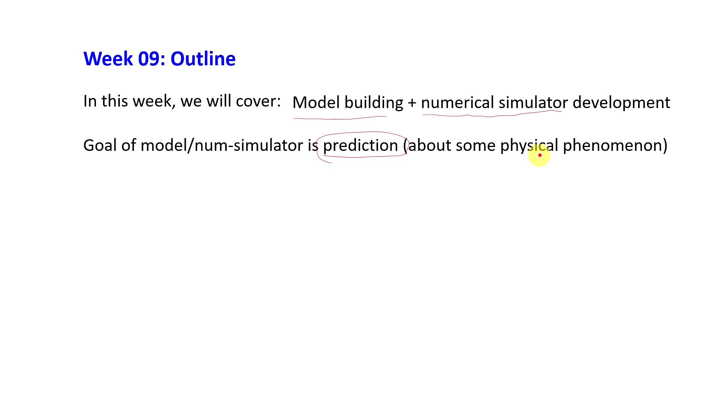About some physical phenomena we want to predict, such as what will be the weather tomorrow, or how much will be the economic growth of our country next year. We want to predict them. And how do I predict them? I need a model for prediction.

Now, the model that we use in engineering, usually there are three types of model. The first type is that gives us a big picture, and generally they are ODE based. It's not necessarily always they will be ODE based, but generally they are ODE based. Similarly, these ODE based models which will give us big picture, if we want to improve it further, if we want to go deep into it, if we want to know detail, then sometimes we have to look at some of the components in great detail. Usually, some of the PDE based model come there.

And then there are many cases where we actually don't know the governing equations of a particular phenomena. We don't know the mathematics of a particular phenomena very cleanly, or as much as we know, they are not suitable for any prediction. In those cases, our models will be based on the available data that we have. And these are the part that we are going to cover in this course later on, that based on data, how can we predict something when we do not have equations? So they are data-driven models.

Now, the model building, it's a process that requires long-term learning and long-term practice. It cannot be taught in a single course in a matter of few weeks. And I don't intend to teach that part here. That is impossible to do so. However, some important idea of model building you have to take from this course, because this course is anyway at the end about numerical simulation. Without a model, the simulation has no meaning. And this model, as well as the simulation, has to predict something about some physical phenomena. Without this entire pipeline, this practice of numerical simulation is of no meaning for engineers.

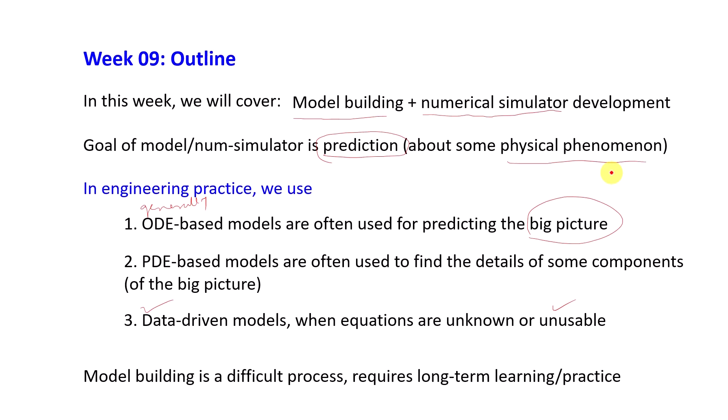So let us take this example, because this example we have discussed initially, then we didn't do about it. So let us take this example once again. The problem here was that we have a payload and we want to down that payload somewhere where it is necessary. Let us say it's a disaster affected area and we are bringing down certain food packets or medical equipments there. And we are using a parachute to down the payload. We are interested to know how much load I can put in the parachute so that when it hits the ground, its velocity will be low enough that it doesn't harm the equipment or food that is inside. And many other parameters we may also be interested to know, where we have to drop so that it falls in a particular place. Many other parameters we may need.

The simplest model, of course, of dropping certain payload comes from using Newton's law. Here we write that m, that is mass of the payload, multiplied by du/dt. U is the velocity, t is the time. So this mass into acceleration is balanced by this mg, that is the weight of the payload. We can solve this equation. This is easy because g is a constant. This is just super simple. Then we start with u at time t equal to 0 is 0. So when I am putting the payload from an aircraft, there is no downward velocity there.

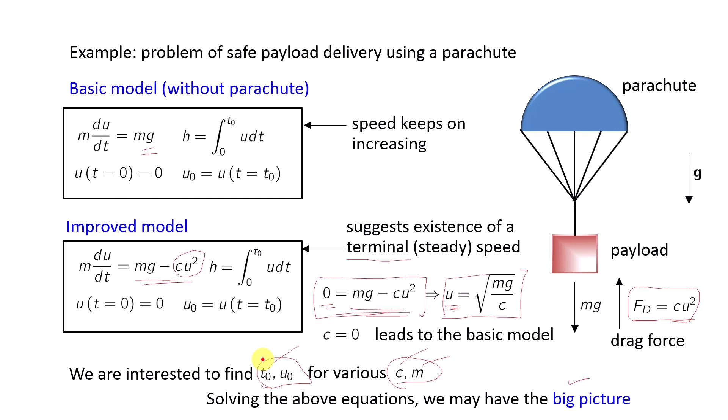If we solve this equation now, we can get the big picture: how much time it requires to hit the ground, and what the speed could be. It will be an approximate picture, not in great detail. So let us say that we want to solve it. We can solve it analytically, but it may not be easy. Going through this integration may be slightly difficult, although it can be done.

The other way is to do it numerically. Instead of doing this integration, we can write dh dt equals minus u. We start from a certain h naught, the initial height, and then based on the speed, h will come down. So dh dt will be the negative of the velocity.

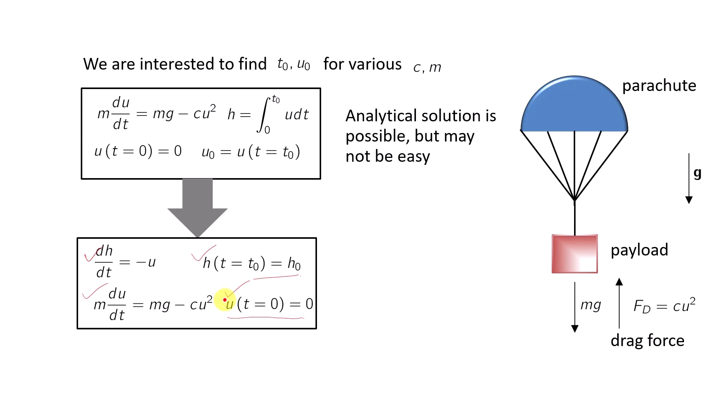And the second equation is the usual equation, m du dt equals mg minus cu squared, where at the initial time u was 0. So we have two ordinary differential equations with two initial conditions, and they are solvable. They look coupled, but they are basically uncoupled. Once we solve u, it can be fed in here to solve h. Numerically, we can solve it very easily. You already have the solver for this, I hope, and now you can use that.

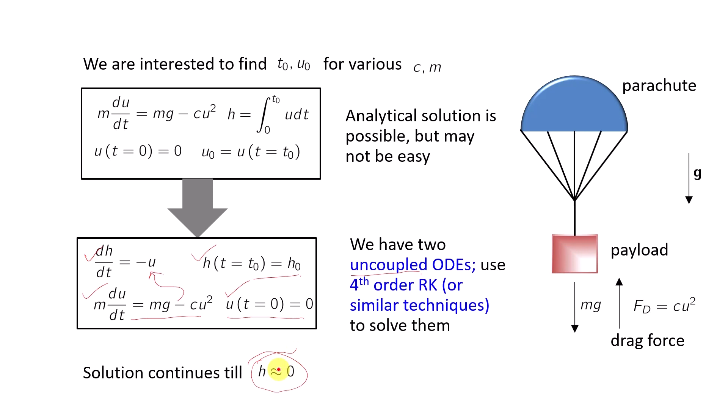Once we solve it, we will get h and u as functions of t. We have to stop the solution, because the solver doesn't know whether h is greater than 0 or less than 0. The solver will keep on running, so we have to stop it when the payload hits the ground, meaning h is very close to 0. At that point, we'll stop the solver and check the results.

So I actually ran this using our old solver that we developed before, you remember, in the predator-prey model. Using that solver, I got this result.

This is the case when we have no parachute, that means c equals 0. You see that the velocity here, this downward speed, keeps on increasing linearly. And it hits very high actually, 140. The payload hits the ground in 14 seconds, very quickly, slightly above 14 seconds. At that point, the speed is 140.

That is understandable because we know that this du/dt is g. So you can see that 140 by 14 point something is about the value of g. So it's understandable that the speed is increasing linearly with du/dt equal to g. So u is equal to gt, and with t being 14 point something and g being 9.8, it would be about 140. 140 meters per second is actually a very high speed,

and it's very difficult for my payload if it contains some sensitive medical equipment or food product. It will probably be destroyed due to the collision at this kind of speed. On the other hand, this is the height, and I started from 1 kilometer height, and then it comes down. Within 14 seconds, it hits the ground. So very quickly it hits the ground, and we can see how the height is changing with time.

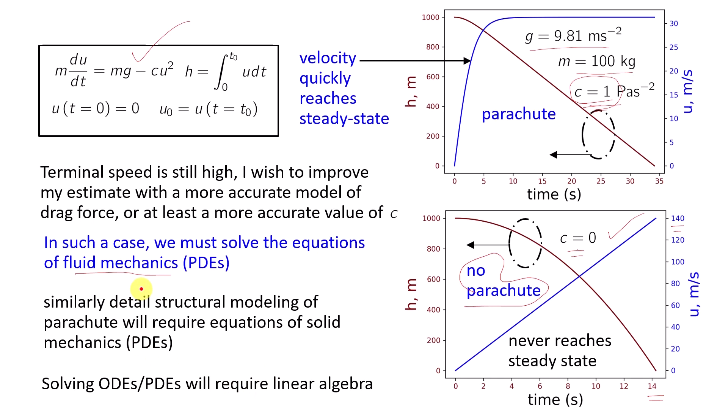So overall, there is no limit to how far I can go model-wise. We can make it even more complicated, but the main point is you can get a big picture, and this big picture is not a bad picture, from a very simplistic model like this. As you improve it and make it more accurate, you have to bring more and more equations and your model will become more and more complex. When you try to solve these ODEs and PDEs, you will require linear algebra. This is where linear algebra, PDEs, ODEs, everything comes together. The entire numerical methods course comes together to help you build the simulator.

But one thing is clear, that most of the travel of this payload will be at constant speed. Only in the initial fraction of a second there will be certain acceleration, and this is what physically happens when we drop some payload or someone jumps in a parachute. The person who is jumping in a parachute will not feel acceleration. After a fraction of a second, it will hit steady state.

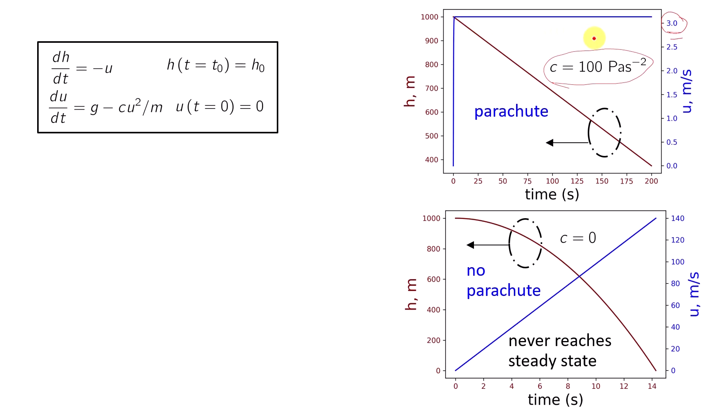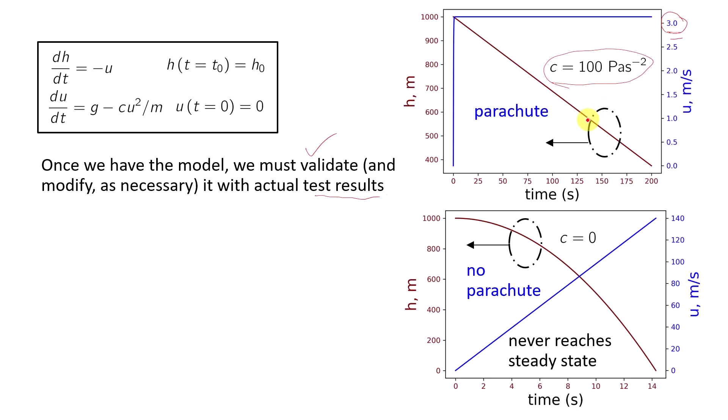Now we have a model which gives us some result. We don't know how good it is. We have to be now ready to validate our model with actual test results, and if necessary, we have to modify our model. So if we have old results, or if we do not have old results, we have to do some experiment to get results, and we have to see whether it is matching with all those results.

So then the entire workflow will look something like this. We have the model, then we have the simulator. From the simulator we get the result, but then first the result will go for validation. From the validation study, we have to improve our model. This is where we are improving the model. Then when we are happy with our model, we believe that it is giving us acceptable results, matching closely with the validation. Our results then can be used in application.

We'll talk more about this in detail this week, but this is the general workflow that you will see in actual modeling. Of course, in a course like this, we cannot discuss this entire pattern of workflow starting from modeling, simulation, validation, and then how the results are used in application, because this becomes a complete project that we take up in making a thesis or making papers or making presentations.

This becomes a complete project starting from a physical problem and then providing meaningful input to the physical problem through model, simulation, and validation. This cannot be taken up in any one course or in this course. So rather than going into this, we are going for some simple models in this course. Some of them you have already seen.

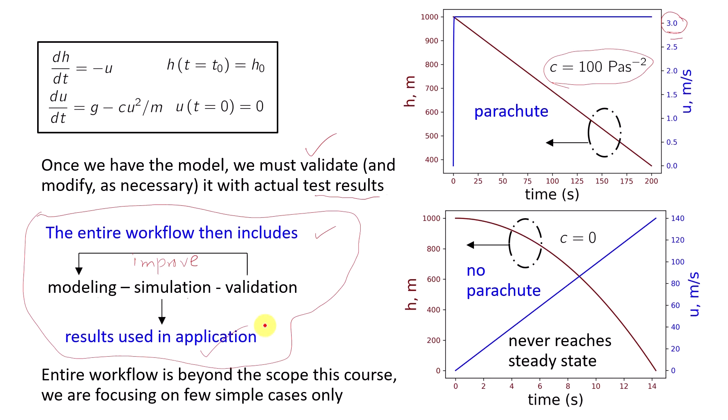So in this week, primarily we'll study the models based on ordinary differential equations. Probably one model we'll study, and then one model I'll invite you to work on, a slightly difficult model. So I'll study an easier model, and then I'll ask you to extend that to a slightly difficult model in your own time. You trying a model or doing a project is not part of this course, but if you are interested, you can do that in your own time.

We'll discuss this entire pipeline of modeling, simulation, validation, but we will not do the validation itself; we'll talk about how we should do validation. In the upcoming week, we'll talk about regression, optimization, and neural nets. They will be more in the regime of data-driven modeling.